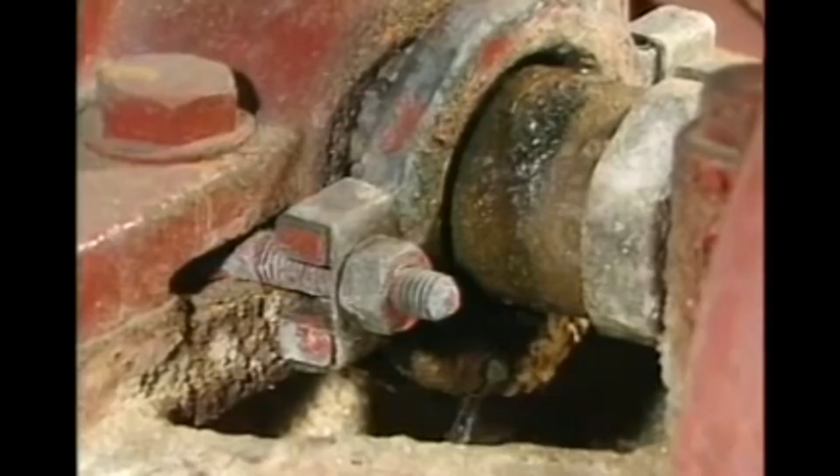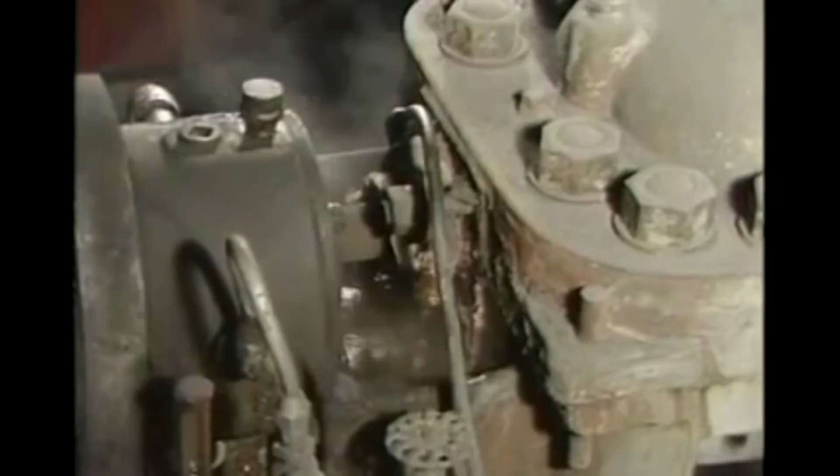Pump leakage, a natural occurrence found in all types of industry today. If not controlled, it creates costly problems that affect you directly. Problems of pollution, a potentially destructive force affecting the environment inside and outside your plant. Corrosion and bearing fatigue, devastating factors destroying equipment and reducing efficiency.

Product loss, increasing costs and decreasing profits. Maintenance requirements, resulting in wasted inventory and the inefficient use of labor. Leakage, slowly eating away at your business productivity. Many industries today attempt to control leakage by using braided packing. Where packing may be ideal in some situations, it is not in others.

Since packing must leak in order to work effectively, it is not recommended for use in industries that follow strict environmental regulations, such as chemical, food processing, pharmaceutical, petrochemical. Here, leakage-related results such as pollution, corrosion, and loss of product cannot be tolerated.

But Garlock, the industry leader in sealing products, realizes this and responds with mechanical seals, the solution to these problems and more. Mechanical seals uniquely designed to eliminate leakage, offering convenience and cost-saving benefits in many areas.

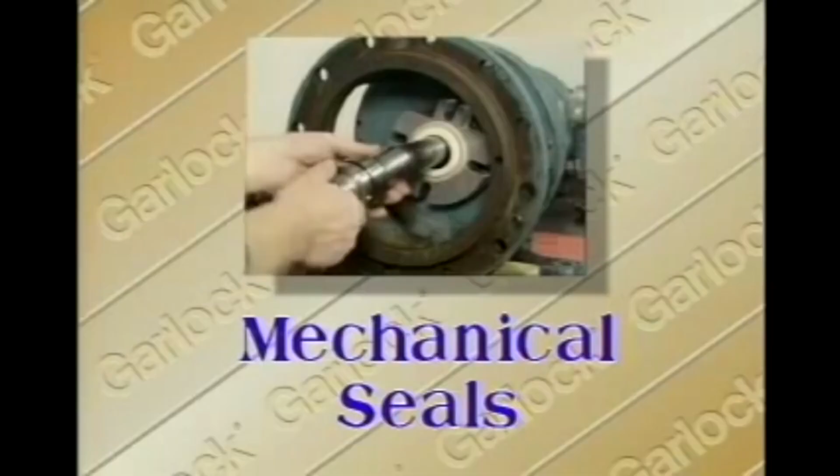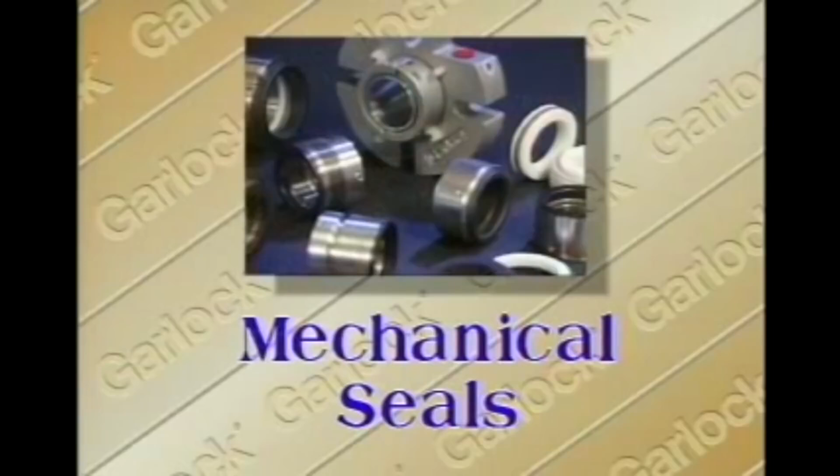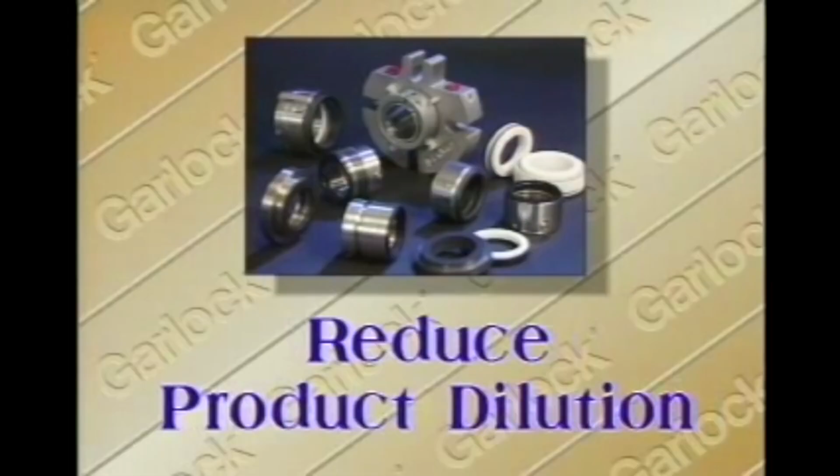Mechanical seals cut down on pollution, ensure worker safety, reduce maintenance and house cleaning costs, and stop valuable product from going down the drain. But the benefits don't stop there. Mechanical seals dramatically improve the life of bearings. Mechanical seals create less friction, increasing shaft and sleeve life by eliminating wear associated with braided packing. And mechanical seals reduce product dilution, saving you money.

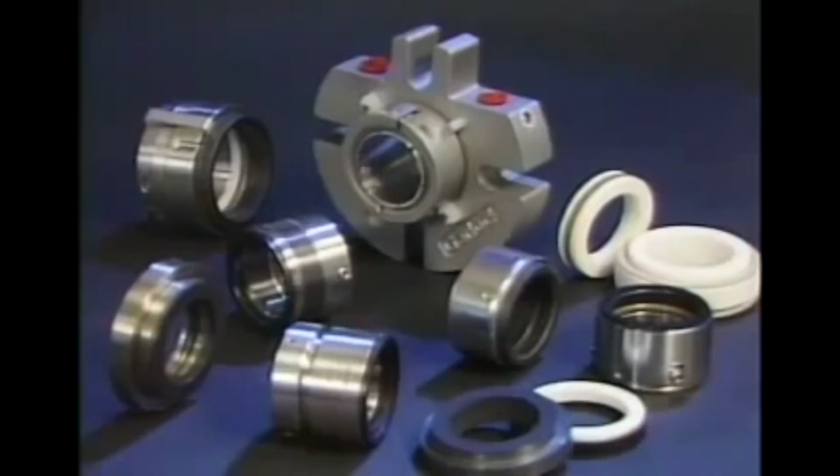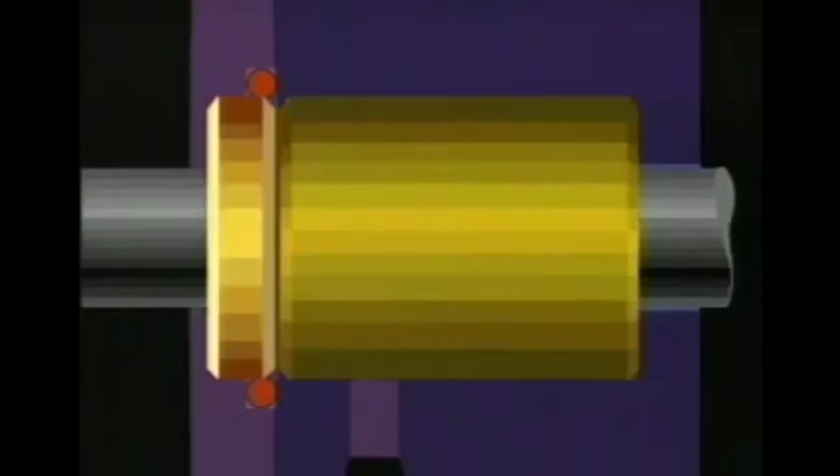To realize all of their benefits, let's take a closer look at how a mechanical seal operates. Contrary to popular belief, mechanical seal design and operation is relatively simple. Basically, it consists of two flat faces, one stationary, mounted in the gland, and one rotating with the shaft in a circular motion. Next, spring pressure is incorporated to help hold the faces together. This spring pressure also serves to compensate for end play and some shaft runout.

Finally, secondary sealing elements are added to prevent leakage along the shaft and around the stationary face. These secondary sealing elements meet a wide variety of applications and are available in several styles and materials. Now, the seal design is complete, an assembly that stops leakage in the three critical areas: at seal faces, at the face of the stuffing box, and under the seal along the shaft.

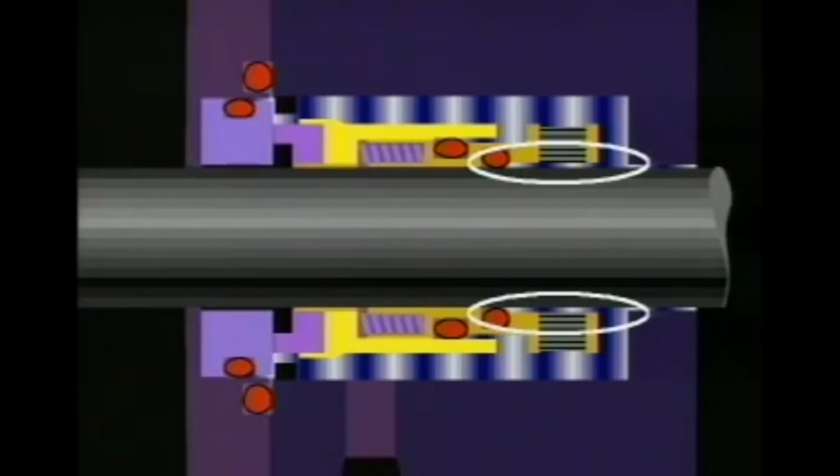During mechanical seal operation, fluid pressure inside the stuffing box forces the two sealing faces closer together, while providing the faces with a lubricating film, reducing frictional wear across the faces. This minute amount of fluid would be considered leakage. However, the frictional heat generated by the faces causes the fluid to evaporate.

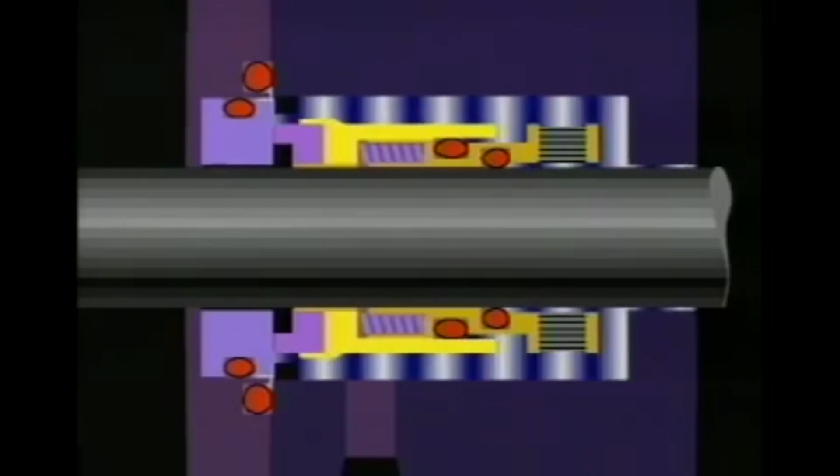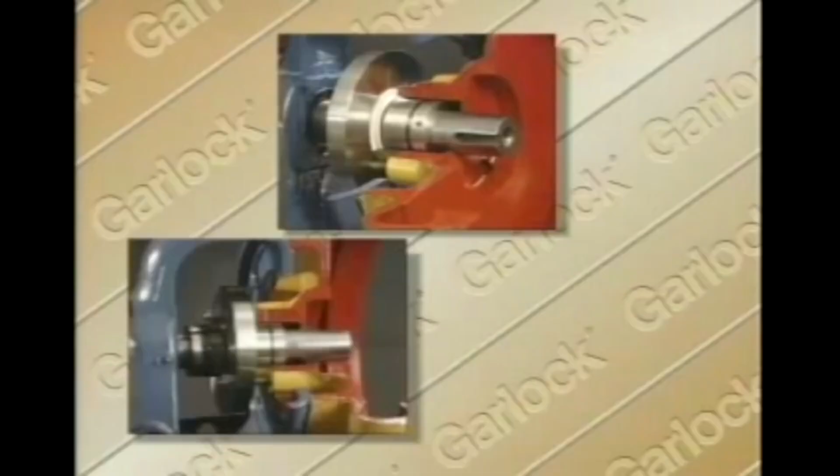Now that you have a basic understanding of seal operation, let's talk about the seal types. Mechanical seals fall into three distinct categories: inside or outside single-mounted seals, double seals, and cartridge seals. Inside or outside single-mounted is determined by the position of the rotary portion of the seal assembly.

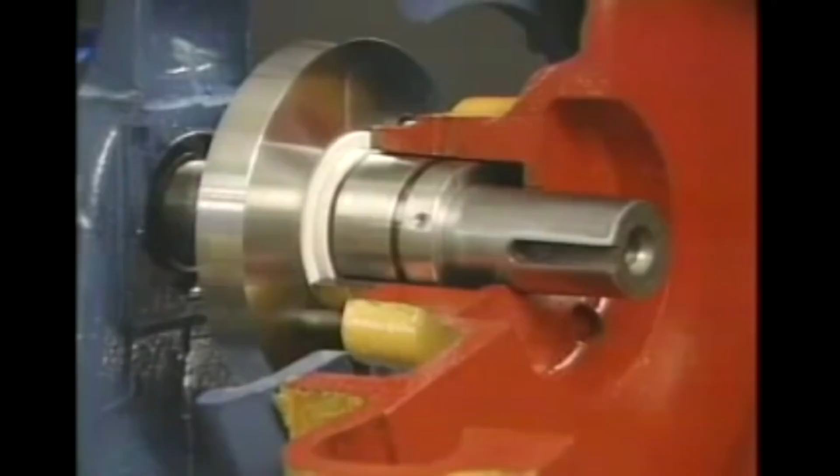With inside seals, the rotating assembly is mounted in the stuffing box of the pump and is completely surrounded by the fluid it seals. This fluid helps to cool the mating faces. The fluid's hydraulic force keeps the faces in contact. And solids in the fluid are thrown away from the faces by the centrifugal force.

Outside seals are normally used when the material being pumped is corrosive or detrimental to the entire seal assembly. By locating the seal outside of the stuffing box, all corrosion-prone elements of the assembly are exposed only to the atmosphere. And because the entire rotary assembly is readily accessible, it's easy to install, inspect, and maintain. Outside-mounted seals are also ideal for non-metallic pumps because together they offer superior corrosion resistance.

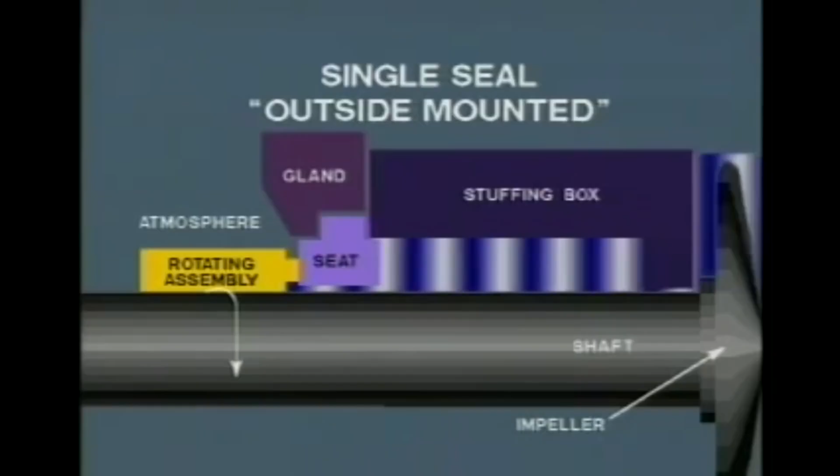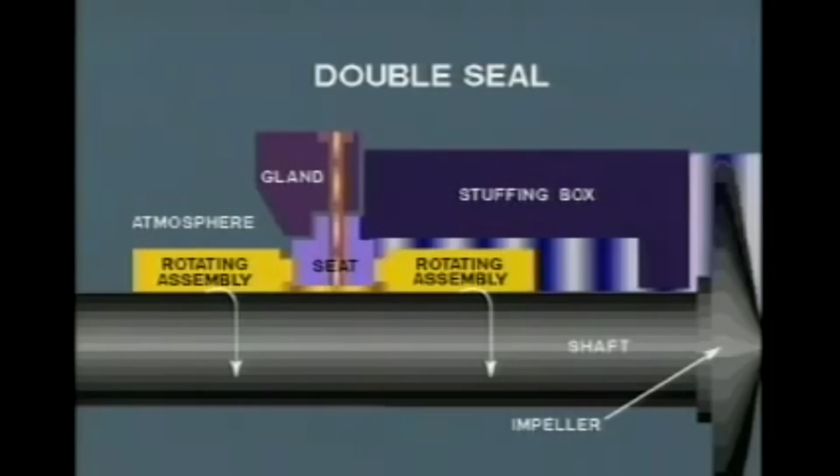The second category, double seals, are recommended when the fluid being pumped is a poor lubricant, abrasive, or a combination of both. A double seal, consisting of an inboard and outboard assembly, allows the introduction of a pressurized, clean lubricating fluid, thereby isolating the product in the stuffing box and the injected fluid in the stuffing box from the atmosphere. Because of this ability to isolate, double seals are also recommended for services that are toxic, flammable, or detrimental to the environment.

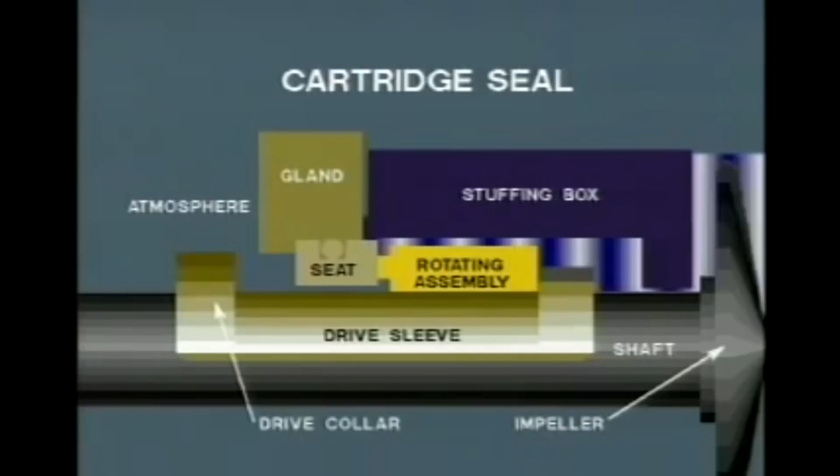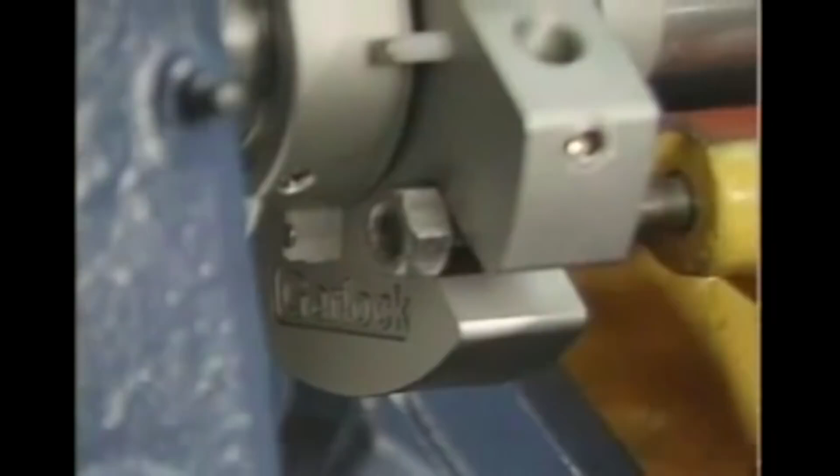The third category, cartridge seals, combines all components into a preset assembly that is easy to install. This eliminates the need for time-consuming, complicated measurements and handling. All cartridge seals come in either single or double versions and are often the most economical choice when converting from packing to a mechanical seal.

In order to meet a wide variety of applications, each of these three distinct seal categories are available in unbalanced or balanced designs. An unbalanced seal allows all of the fluid pressure in the stuffing box to act as a closing force on the faces. This particular design is most effective in low-pressure applications.

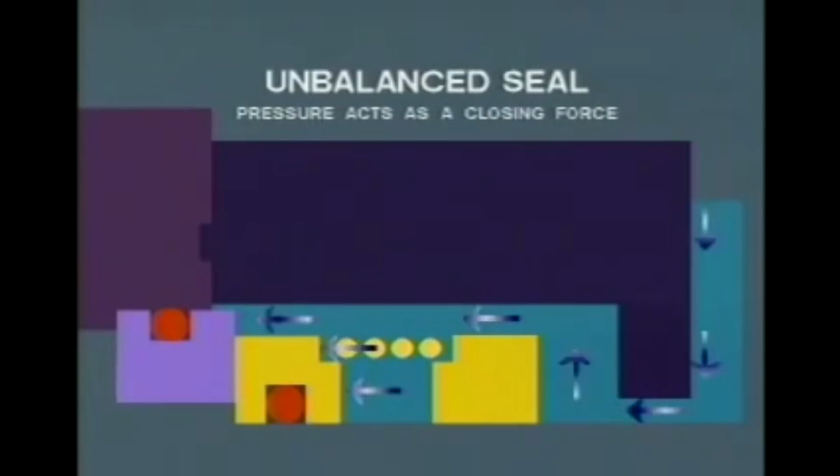For high-pressure applications, however, a balanced seal is required. Here, a change in the face configuration allows some of the fluid pressure to be redirected, offsetting the total closing force on the faces. This reduction generates less heat and normally extends the seal life.

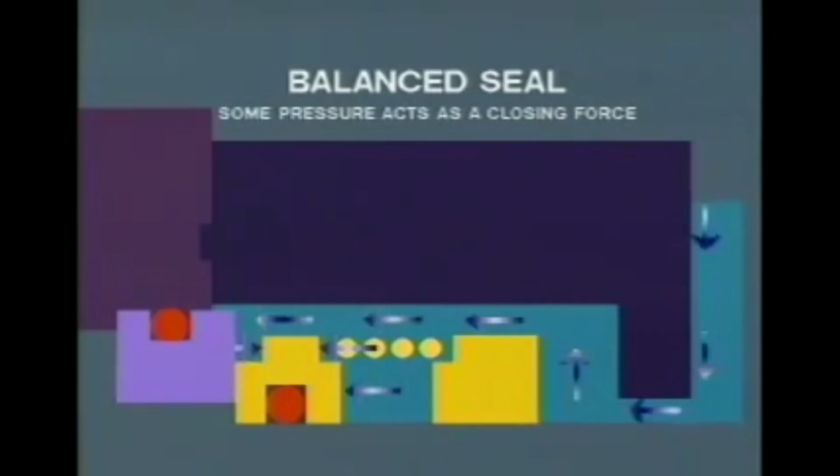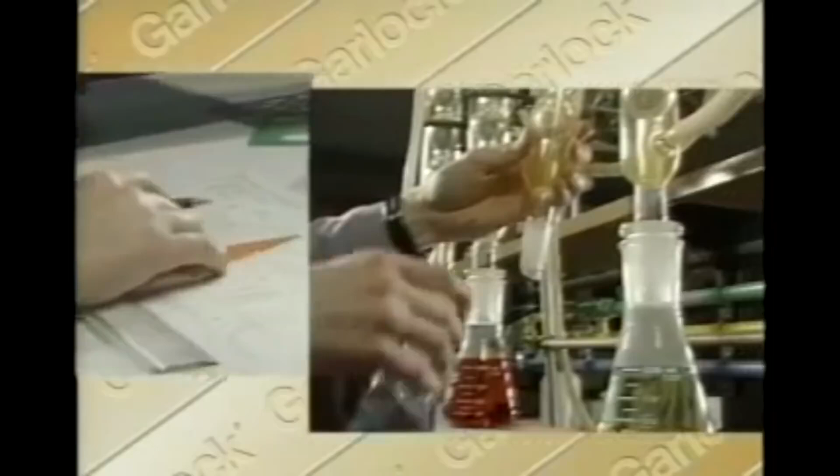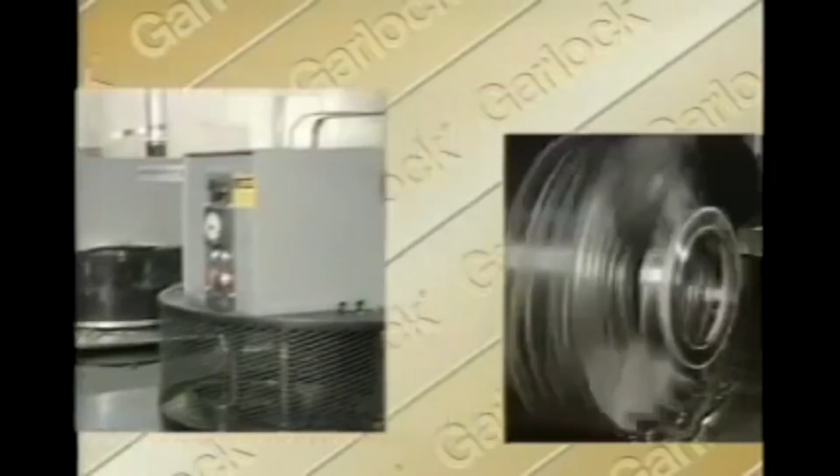Garlock, the leader in providing quality sealing products for the past 100 years, offers an in-depth line of cost-effective mechanical seals. Mechanical seals that are specifically designed to meet the critical service requirements demanded by today's industries. But a seal is just a seal if it isn't supported by innovative people. And the Garlock people, with their commitment to service and to quality, deliver the outstanding performance you expect and deserve.

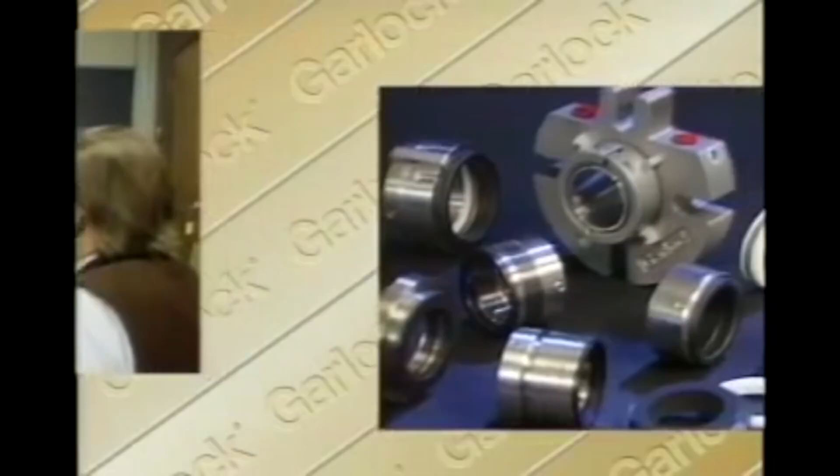Mechanical seals. Eliminating pump leakage, controlling costly maintenance problems, saving you time, money, and energy. And Garlock, the sealing experts, providing the right product for your application.